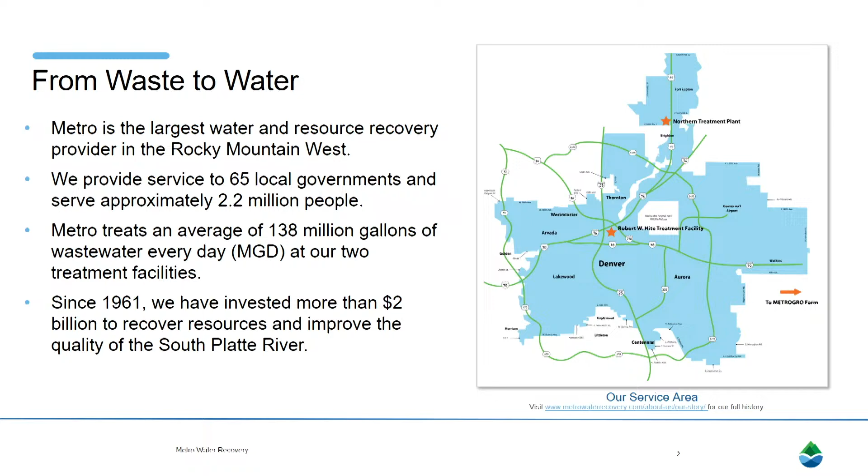So the map that you can see here shows the service area for Metro Water Recovery, and there's 2 stars on that map, the Robert W. Hite Treatment Facility, which we'll be talking about today, and also the Northern Treatment Plant. And so we'd like to give you an overview of the facilities today, a project summary, and a summary of the regenerative thermal oxidizer process, which is what we are seeking a height exemption for. The reason for that height exemption is compliance with federal and state regulations. And then we'd like to show you a site plan and some renderings so you can see what this stack height will look like in the vicinity that we'll be locating it.

So there are 2 wastewater plants within Metro Water Recovery's facility system. The Northern Treatment Plant is shown here at the top. It's the smaller of the 2 facilities. It's not the one that we're focused on today. Today we're here to talk to you about a height exemption associated with the Robert W. Hite Treatment Facility located in Commerce City. You can see the photo on the bottom left that shows the digesters in the background. That has a rated capacity of 220 MGD. This facility has an existing cogeneration facility associated with it. So there's biogas produced in the digesters, and that gas is used in turbines to produce electricity. That's at the end of its useful life, and that's what has really generated this project.

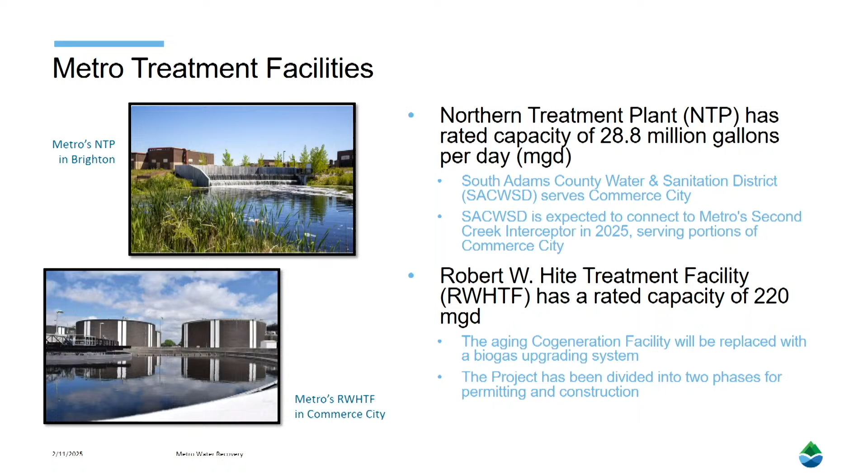So Metro has been a pioneer in the generation of renewable energy since 1984. You can see the aerial of the cogeneration facility in the upper right. Again, that converts biogas into electricity that's used on site at Metro Water Recovery's facility. We completed a biogas utilization study in 2022 to determine how to move forward with this aging facility, whether to replace it in kind with another cogeneration facility or to transition to production of renewable natural gas, which could then be injected into Xcel Energy's natural gas pipeline. And that option, which was selected to move forward with, reduces on-site combustion as compared to their current operation, and also reduces on-site greenhouse gas emissions.

So this project is all being completed within the Robert W. Hite Treatment Facility, so inside the boundary. It is not changing the land use or the nature of operations at the facility. They're remaining unchanged, and they're consistent with Metro's amended conditional use permit. This project's actually being completed in 2 phases. Phase 1 includes construction of a boiler facility that's going to provide hot water to the treatment processes on site that need it. That project was approved by Commerce City and is currently in construction. The second phase of the project is going to replace the cogeneration facility with a biogas upgrading system, and that's going to be located in the footprint of the current cogeneration facility.

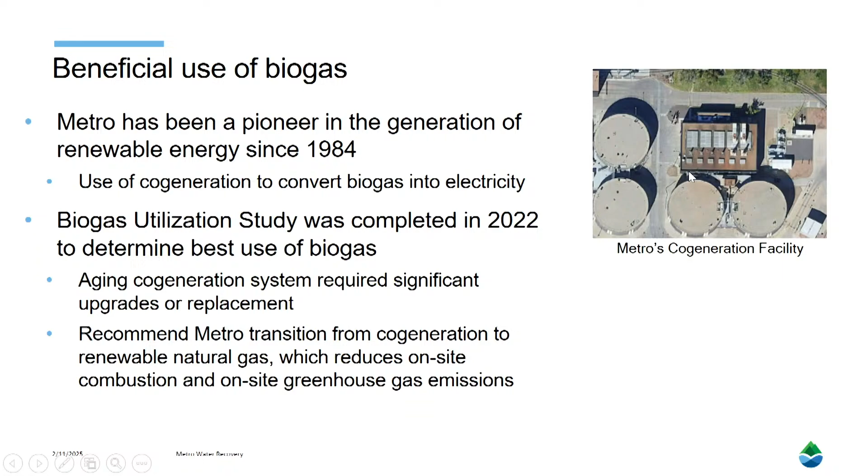So if you go back to this aerial here where you see the rectangular building that is on the upper part of the photo, thank you, that is being replaced by what you can see in this rendered image, a smaller facility and some enclosures and tanks. And you can see in the foreground of that rendering is a stack that is the regenerative thermal oxidizer, and that is specifically what we're seeking the height exemption for. And I'll get into more details on that.

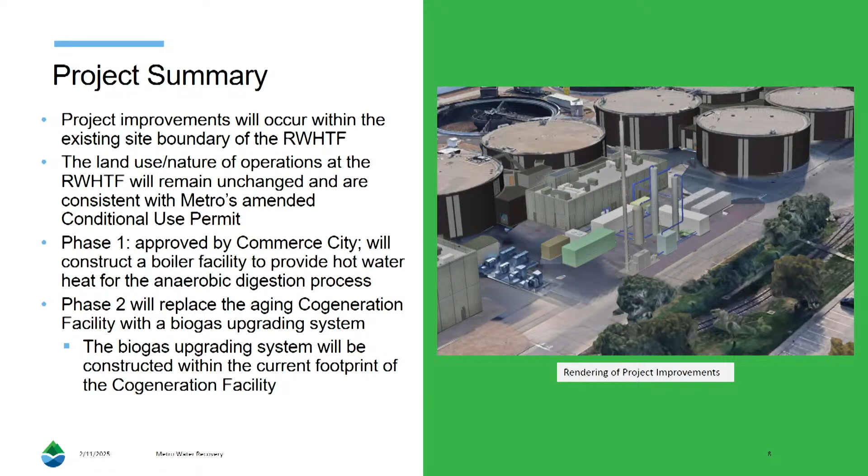So just a little bit of background on treating biogas. It's produced in the digesters that you can see in this photo. The anaerobic stabilization of solids that come in the door into the wastewater treatment facility produces biogas. That biogas has to be flared if it's not beneficially used. And so, currently we're using the cogeneration system, and the biogas upgrading system that we are designing as part of phase 2 of this project is going to include treatment that separates the methane from the other components, including carbon dioxide and hydrogen sulfide, allowing the treated methane to be discharged directly into Xcel Energy's natural gas pipeline for consumption within that system.

And the part of the biogas that's being separated and not being used in the natural gas pipeline is essentially mostly carbon dioxide, a little bit of hydrogen sulfide. That has to be oxidized prior to being emitted to the atmosphere. Otherwise, we're exceeding our H2S concentrations at the site. And so the project includes a regenerative thermal oxidizer, which is shown here.

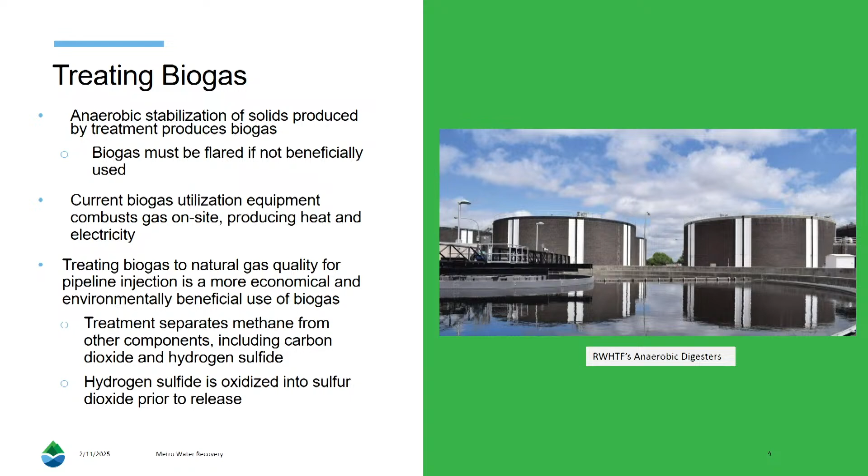There's an exemplary photo shown here. This piece of equipment is specifically combusting the waste gas component of the biogas that's produced. So of the separation, we're separating it into the usable part and the non-usable part. The usable part is being injected into the natural gas pipeline. The non-usable part is being combusted in a regenerative thermal oxidizer.

This process combusts the H2S into SO2, or sulfur dioxide. It uses some amount of natural gas to maintain a high enough combustion temperature to make sure that we get a complete reaction. And we completed quite extensive air modeling of this system to understand what height we needed to emit the sulfur dioxide at.

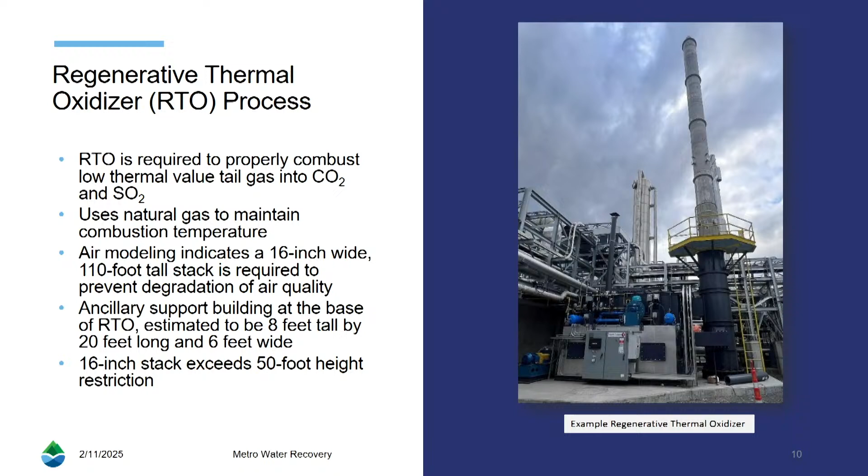The modeling showed that our stack height needs to be 110 foot tall and 16 inches in diameter, and that we would then not degrade the air quality in the area because of the SO2 emissions coming out of that stack. There's an ancillary support building at the base there, but really it's that 16-inch stack that's exceeding the 50-foot height restriction.

As I mentioned, there are operating air permits at the facility. They're issued by CDPHE, Colorado Department of Public Health and Environment's Air Pollution Control Division. Right now, the combustion source at the plant is that cogeneration engine operated by ENGIE on site, as well as some miscellaneous emissions associated with wastewater treatment operations.

But in particular, the addition of this RTO and the combustion of the SO2 needs to meet the 1-hour sulfur dioxide national ambient air quality standard, which is 196 micrograms per meter cubed. And as I noted, that 110-foot stack height is needed to maintain the air quality.

This graph on the right is from the modeling that was conducted as part of this project. You can see on the y-axis is the SO2 concentration at the vicinity of the site versus the stack height of the RTO. So at a 30, 40, 50, 60-foot stack height, we were exceeding the thresholds, but at that 110-foot, we were below and could meet the existing air quality requirements.

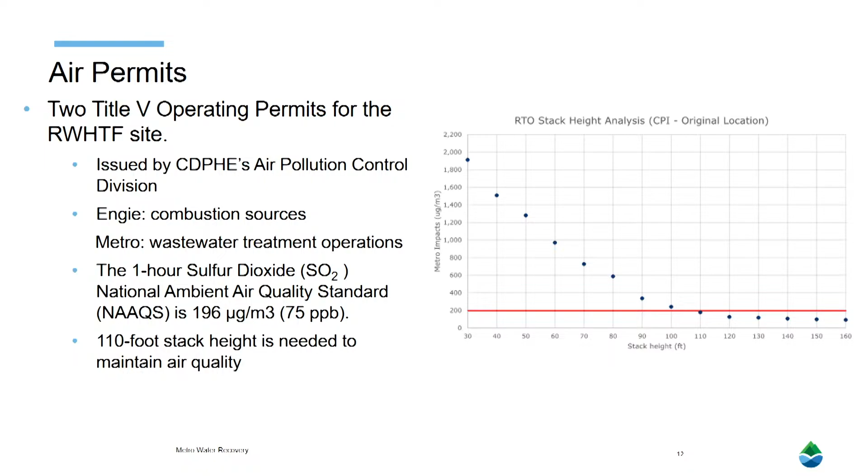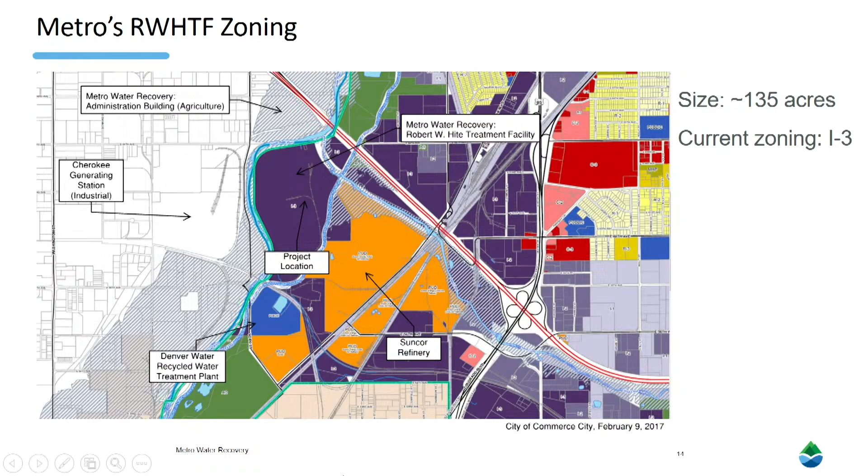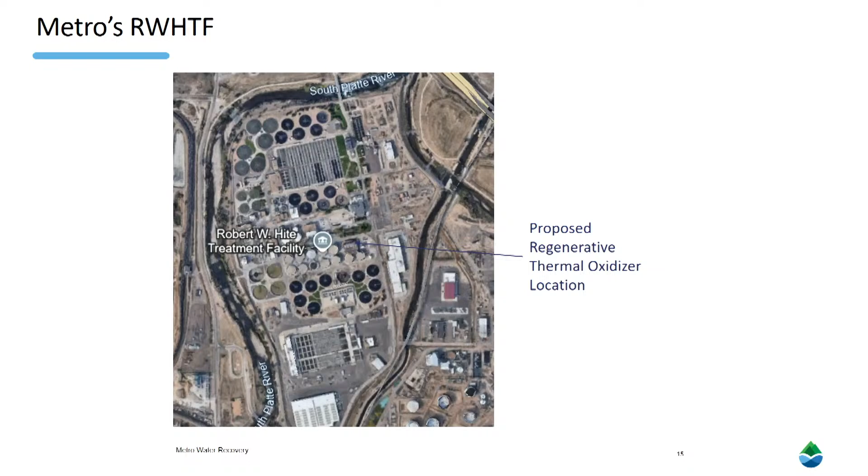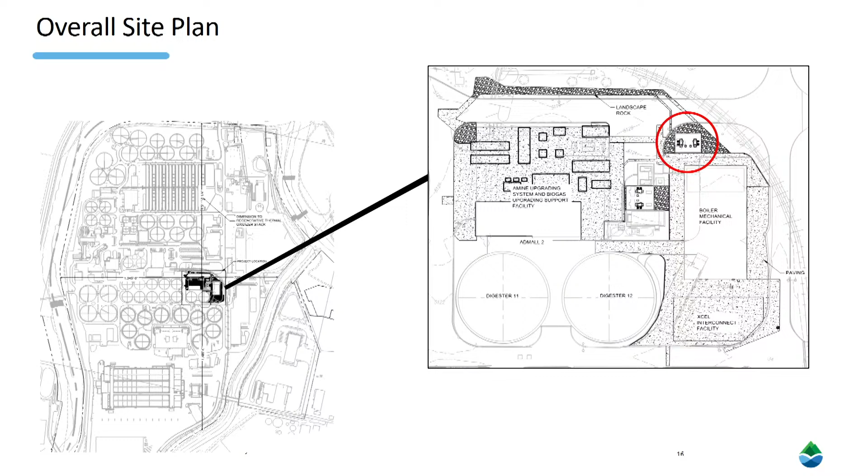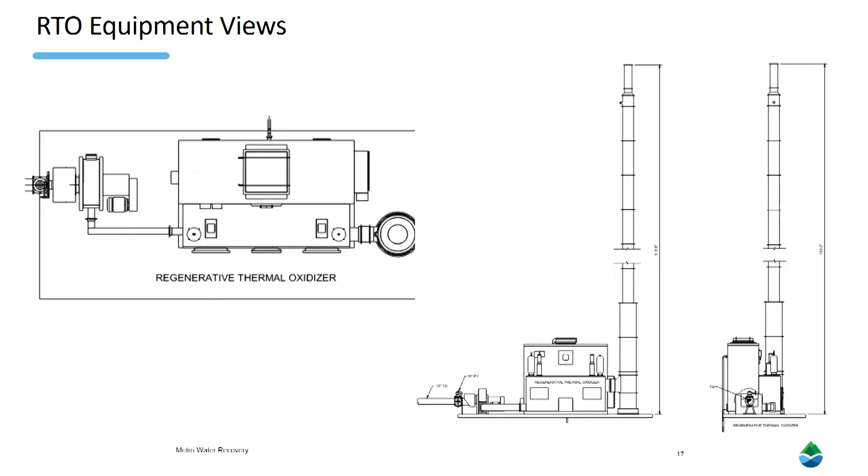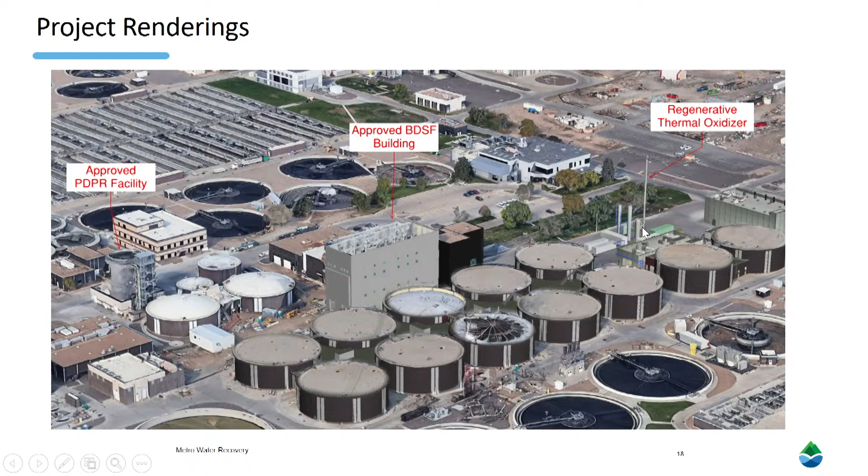Looking from a different angle, again, you can see the circular digesters. Now we're looking to the northwest, and again the regenerative thermal oxidizer stack height—you can kind of see how that'll fit into the landscape. In the foreground is a rendering of the two-story boiler mechanical facility, part of phase 1 of this project, currently in construction. That's below the height limit; no height exemption was needed for that.

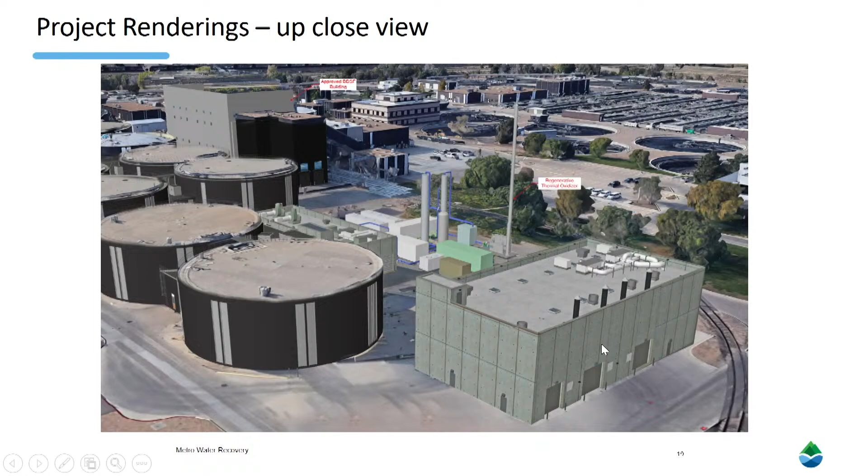Just one more broad view of the facility, looking to the southwest here. Again, you can see the other two taller structures that required a height exemption, and the regenerative thermal oxidizer in the foreground.

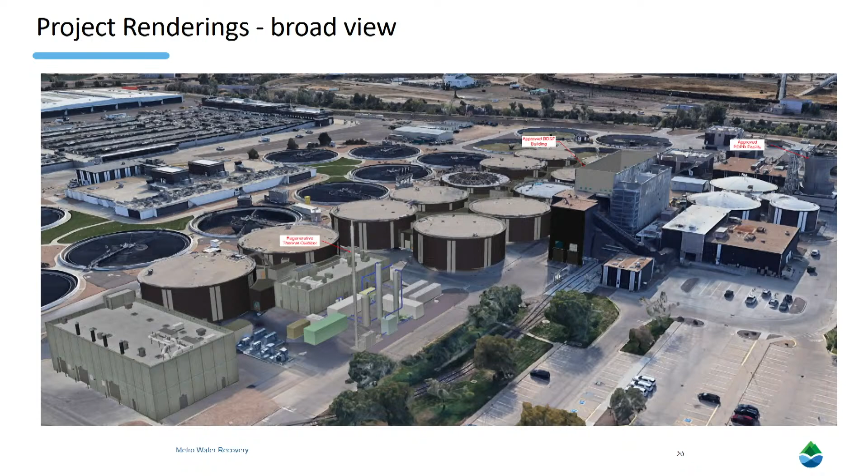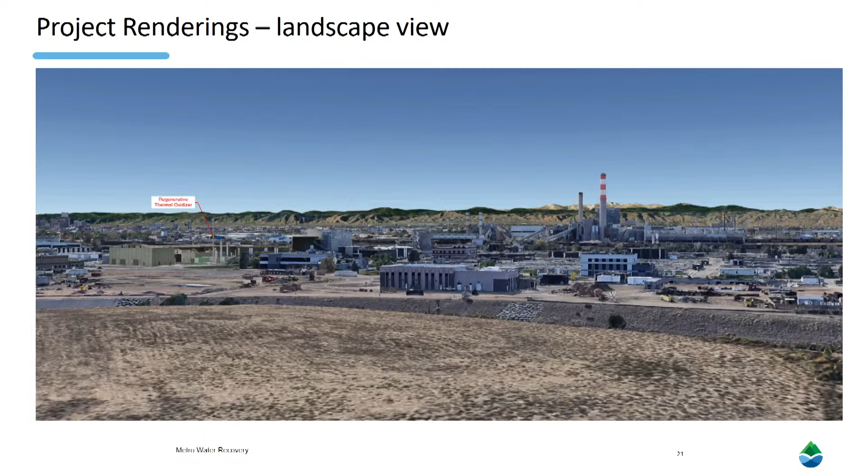Maybe just some schedule information. The phase 1 building division review was done under the 2018 IBC. Construction began last year. Phase 2 design was submitted to the City Building Division in December 2024, also reviewed under the 2018 IBC per earlier correspondence, so there's consistency in building codes across the project, even though it's being constructed in two phases. We're anticipating notice to proceed for Phase 2 construction in 2025, with the full project commissioned in 2027. That's the overall construction schedule.

And that's all I have.

Thank you. Are there any questions for the applicant, board? Sorry, we'll jump into the staff presentation in case I cover something, and then we'll go through.

Before you this evening is the Metro Water Recovery Height Exemption, AH 24001. Just to clarify from earlier, they're requesting a 110-foot tall exhaust stack where the zoning code only allows a 50-foot building height maximum.

For those tuning in for the first time this evening, what is a height exemption or exception? They're used to address situations where the height standards of the code are too restrictive. This may be due to state or federal regulatory changes, technology advancements, or other extraordinary circumstances where you need a building that's over whatever the zoning limit is.

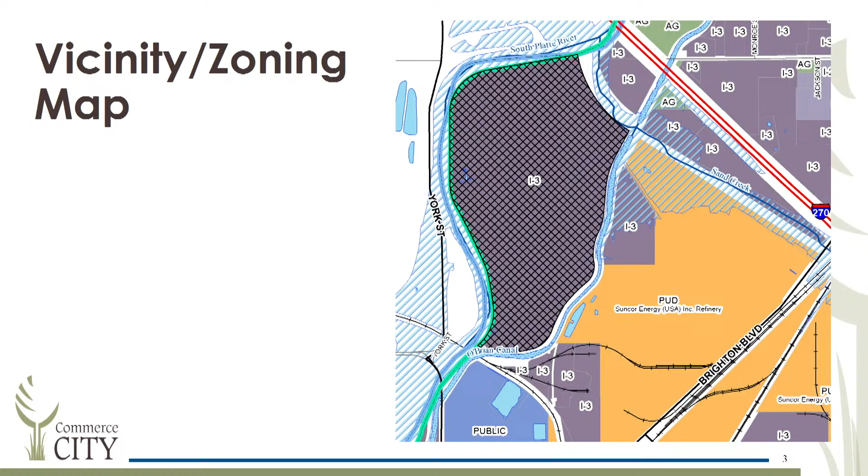Case summary—as mentioned, there's a development plan currently in review with us, and the phase 1 project has already been approved.

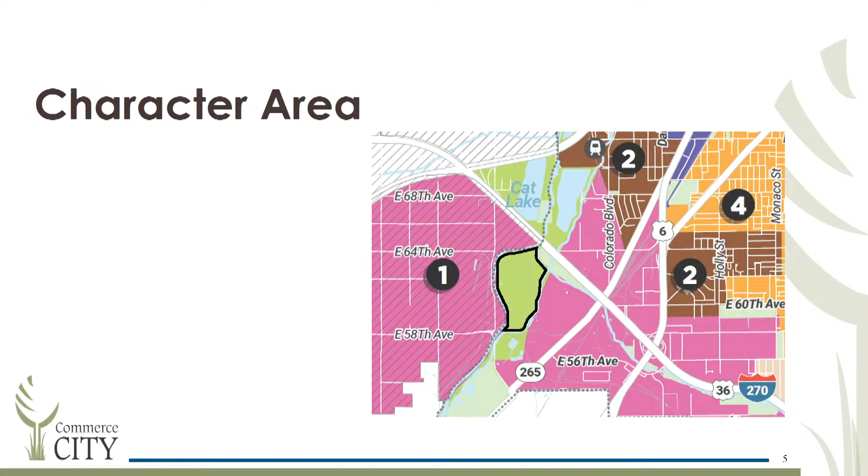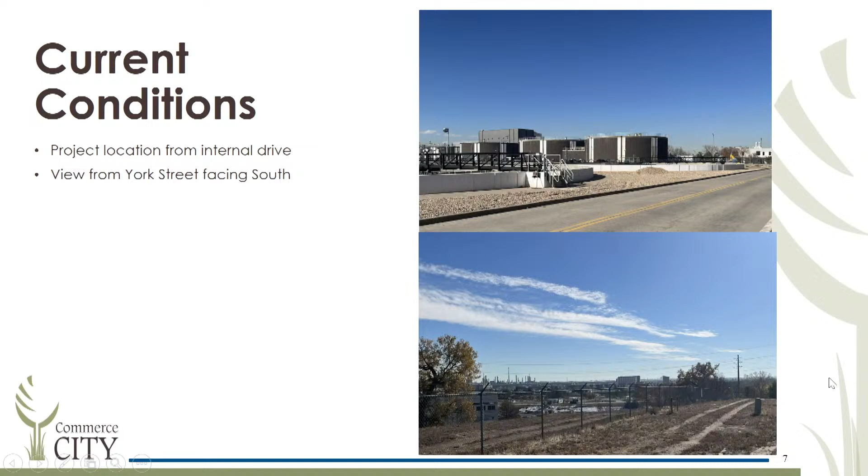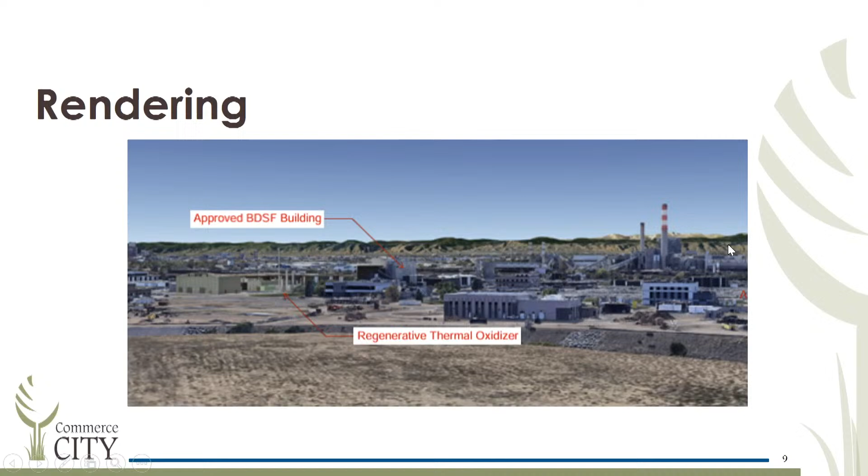Here's a rendering of the site that was shown by the applicant; it's fairly centrally located. I'll back up to the aerial so you can see it again—right here is the location of the project, so it's fairly central to the site itself.

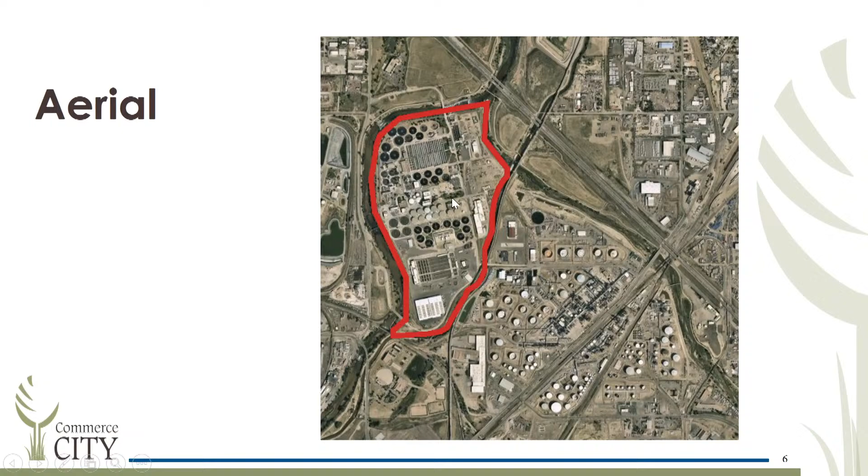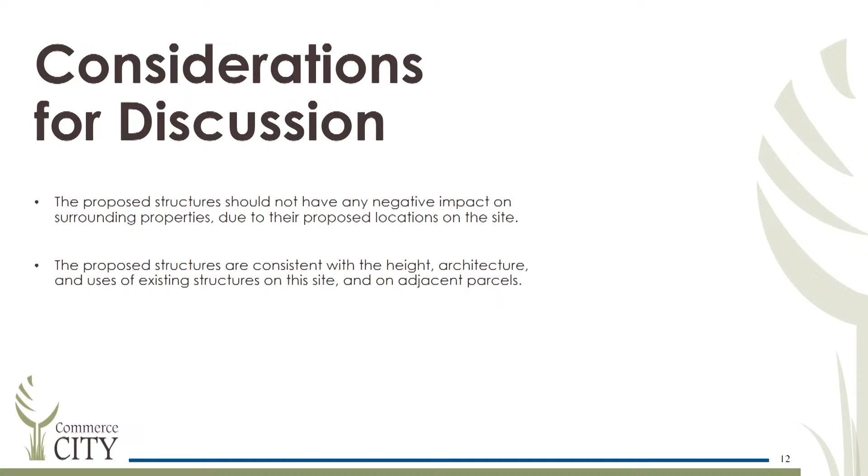Some considerations for your discussion: the proposed structure should not have any negative impacts on the surrounding properties due to the site being so centrally located. The proposed structures are consistent with the height, architecture, and uses of the existing on-site and adjacent parcels, like the Suncor Refinery and the Xcel Cherokee site.

Staff is available to answer any questions. Great, thank you so much. Okay, board, any questions?

Yes, I have one question: will there be any visible flaring from this stack? I'll direct that to the applicant. My understanding is no, but we'll let them clarify. That is correct, there will not be any visible flame or flaring off the top of that stack. Thank you, that's my question.

Any additional questions? Yeah, I also had a question along that line. You mentioned flaring - so when you're saying no visible flaring, there's still flaring. The facility has 4 existing waste gas flares that have been permitted separately and are not above the required 50-foot height. Those, when the biogas is not being beneficially used, are in service, and there is a little bit of visible emissions from those existing flares, but that's when the raw biogas is being flared in an existing structure.

So this one we're talking about, flaring is probably not the right term, right? It's sort of combusting the H2S to SO2 in the gas. So this is really not flaring of the biogas, and there's no visible flame from this structure. And that's existing already, is that correct? The 4 flares I mentioned are existing, yes.

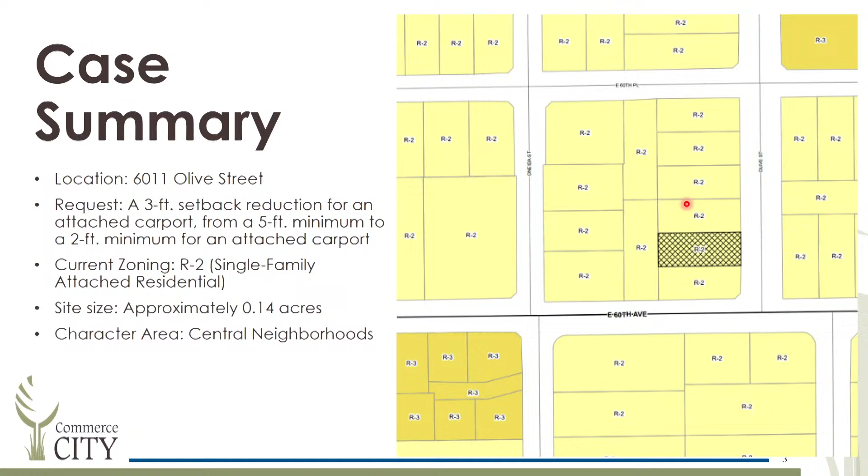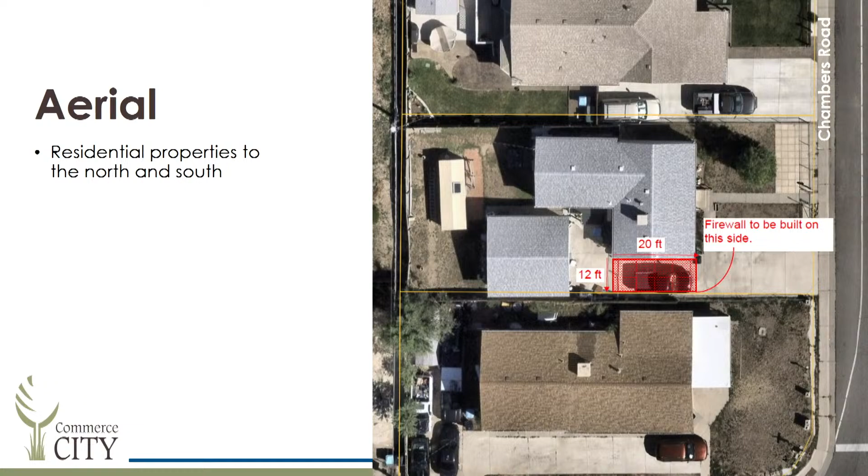As of today, there have been 0 public comments. And staff has found that the application meets the approval criteria for a variance, specifically that the variance does not alter the character of the district, is for a variance that is not self-imposed, is not of substantial detriment to the adjacent property owners, and is needed for the owner to utilize their property. A full analysis of all approval criteria may be found within your packet, and staff is able to bring up any criteria that you all would like to discuss or just look at further.

So after staff analysis, staff has found that all the relevant development review team agencies, such as the Planning Division, Engineering Division, Fire District, and Building Division, have reviewed the proposed variance and have no further comments at this time. A building permit is next required, in which greater detail, including the design, size, aesthetics, and safety measures such as a fire-rated wall, will be reviewed.

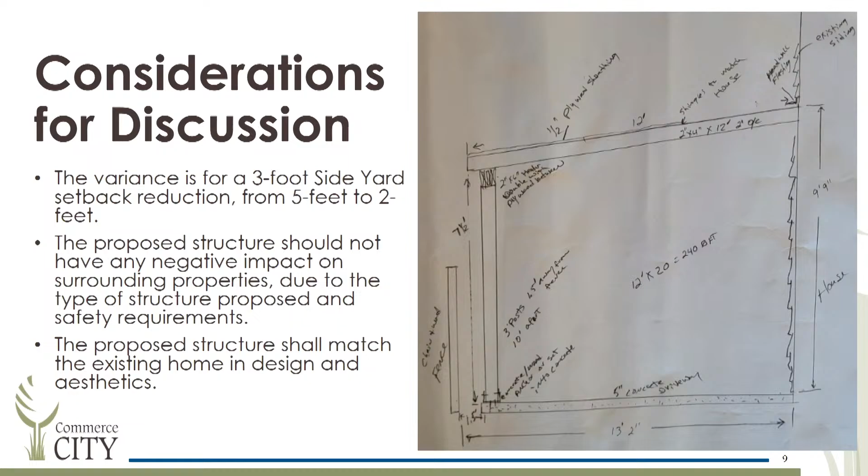Staff is now able to answer any questions as well as the applicant. Thank you. Great, thank you. Does the board have any questions for the applicant or staff?

Yes, member. So I will be voting yes on this to approve the variance. However it comes out, I would like to have the opportunity to find out exactly how this all happened, because the applicant did come before council, and it was relayed to him that the carport wouldn't be a problem. He felt obligated to take it down, and he did, and now we're to this point. And I don't understand why he's having to apply for a building permit, or why he is having to put up a firewall. It just does not make any sense to me. So I want that to go on the record. And I will be following up on this after the vote tonight, however it comes out. So thank you.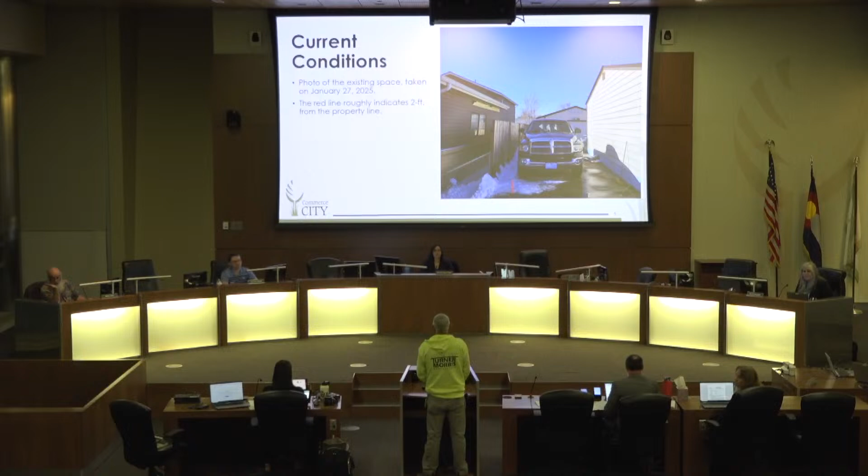Thank you. I would like to make a motion. Public. Oh, did we? Oh, sorry. My bad. If you could close that, if you're done. And do any members of the public wish to provide comments on this case? Name and address. I'm a close neighbor that lives very close by. Sorry, my name is Verona Gonzalez. I'm also a lifelong resident of Commerce City. 7021 East 60th Avenue. So I'm right here on the corner, directly across from Frank.

And, sorry, I digress. I, first and foremost, wanted to thank you, Mrs. Douglas, for your comments at the very beginning, because this has been a long and arduous process, and I know for Mr. Martinez all along, and came at a lot of confusion, not for just him, but for us and our neighborhood in particular, which is a main thoroughfare, but also seems to be particularly targeted as of recently with some of these things and changes

that are maybe coming to be zoned with design developments of new Commerce City and the like, but not that have ever been required or that are of what the foundational Commerce City is and has ever been, but also changing these things, bringing down and requiring full structures, which I know does not speak to you. That goes to building and zoning and far more, but when you come down and look at fire risks and everything like that, what was taken down and what's being required to be put up is far different. And, as a member of the public, it is concerning the way our neighborhoods are being able to handle our properties, we're able to maintain them and keep